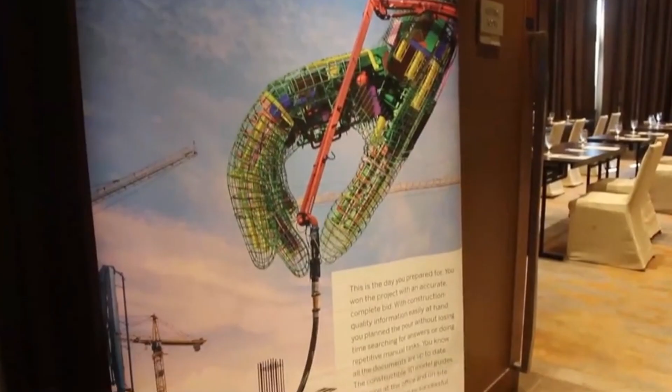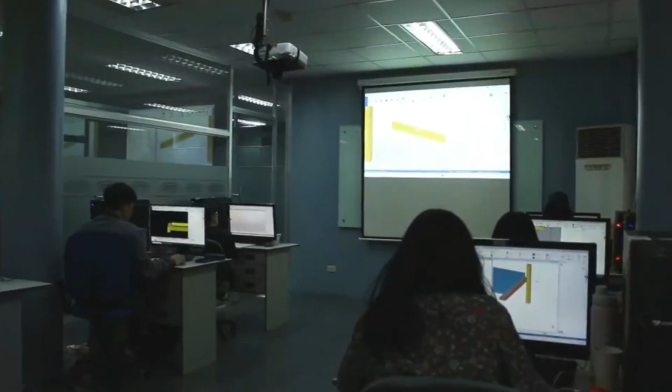As the sole reseller of Tekla Solutions by Trimble, VTS offers a comprehensive range of cutting-edge products and services to the building and construction industry. Our solutions include Tekla Structures, Tekla Tedds, Tekla PowerFab, Tekla EPM, Tekla Structural Designer, SketchUp Pro, and Trimble Connect. We also provide solutions for enhanced project visualization through augmented and mixed reality. Our solution for AR and MR includes XR10 with HoloLens 2 and Trimble Connect AR. VTS is the only authorized training and Tekla professional certification center in the Philippines.

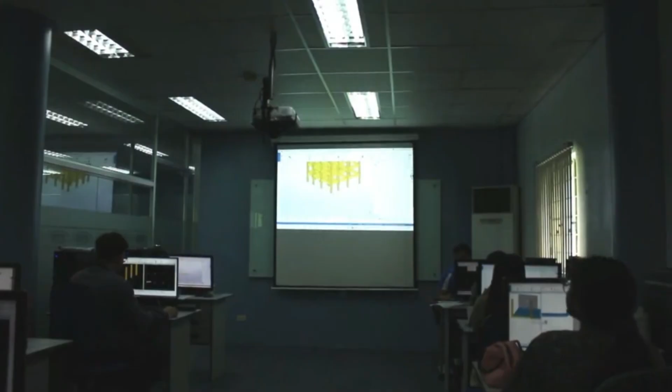In addition, we also provide linear construction material optimization solutions. We offer Raiden Systems, CP Manager, and AutoNest so that construction leaders can optimize their material usage, minimize waste, and streamline their production processes. Overall, we are entrusted by Trimble Inc. with the sales, marketing, business development, and technical support across Trimble's building solutions portfolio. We are one of the leaders of this technology.

We at VTS believe that customer engagement and enjoyment are just as important as delivering top quality solutions. We take pride in channeling opportunities and in fostering a strong sense of community amongst our clients. At the heart of our business, we place a strong emphasis on cultivating meaningful relationships with both our existing and new clients. Our commitment to customer service is unwavering, and we take pride in providing easy to approach local support that is always reliable and transparent.

Our goal is that when people think of Tekla Solutions, they immediately think of VTS, a trusted partner and industry leader that is dedicated to helping our customers achieve their goals and reach new heights of success. Vibrant Technology Solutions Incorporated, channeling opportunities. Tekla Solutions by Trimble. Still different, but always better.

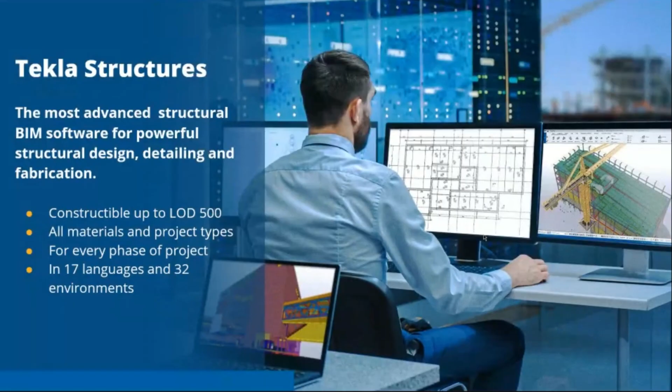So Tekla Structures is used by professionals worldwide. Tekla has been the industry standard for structural design and precast detailing nowadays. But let me show you how Tekla Structures evolved through the decades. Tekla began with steel origins, with a primary focus on steel detailing. But over the decades, it became a comprehensive platform addressing multiple materials like precast, concrete, rebar detailing, and many more.

As long as the material can be added in the solution, you can alter or model all the details inside Tekla Structures. This expansion in precast concrete solutions marked a significant milestone, bringing special tools for complex applications. Now, Tekla 2025 represents the culmination, and this development introduced advanced automation and collaboration tools that redefine precast delivery efficiency. So that's the evolution of Tekla.

So Tekla went from the steel detailing focus up to right now, where any material type can be created throughout the solution. Number three, let me show you the key features or the advanced tools for precast application that can be used in Tekla Structures.

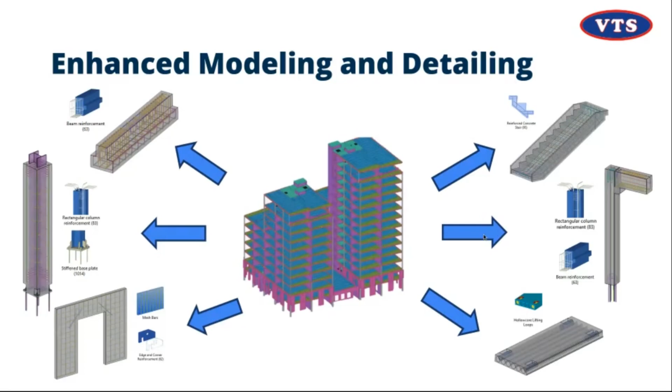In Tekla Structures, you can pick one point or two points to easily create our stairs, which already include the reinforcement details and the embeds you need, and all the details for the part will be easy to create. So let me give you a demo video so we can see in action how Tekla Structures can create constructible or enhanced modeling.

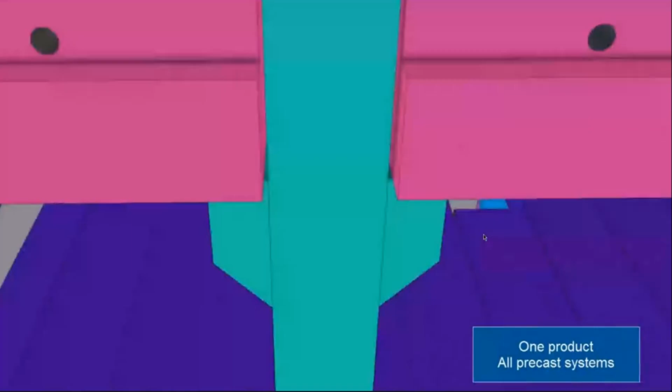With Tekla Structures, you can create a highly detailed constructible model with all types of precast components. Let me show you some sample projects where we can see all the details. For example, you have a column with the detailed reinforcement inside. You can also create detailed beams, walls, and even the precast slab details inside it. Then after that, we can easily do fast modeling.

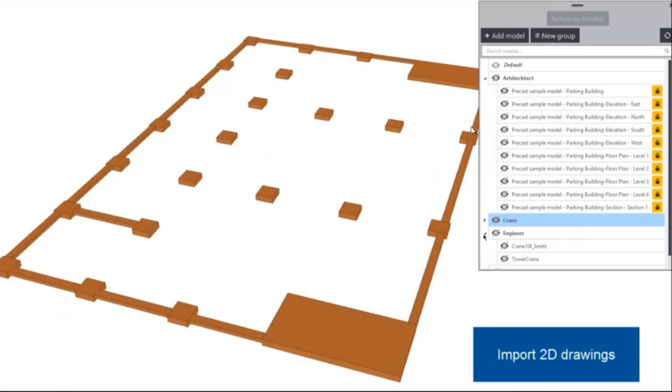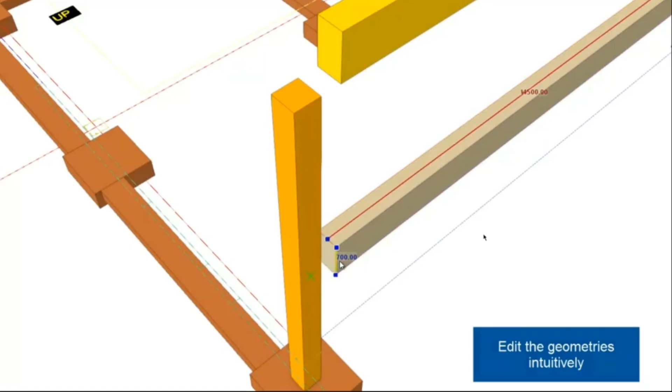For example, if we have a flat 2D CAD inside, we can model the column in just one click, beams in just two picks, and we have features to copy them to make the modeling pace much faster. And editing the geometry has never been easier in Tekla Structures. And for precast component connections, we have built-in ones that you can use, which can still be adjusted.

It depends on your profile needed. So the revision or profile modification will be easy. Even the adjustment, it will automatically adjust.

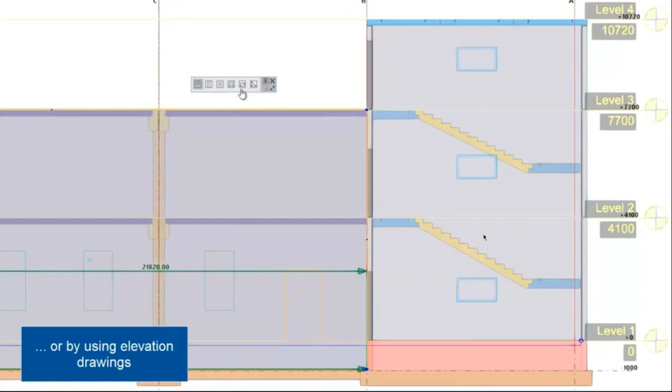For example, you have walls you're using. We have wall layout modeling implementation that we can use to easily create openings, even layouting our plans inside as a reference and creating the details inside it. It will make 3D modeling much easier.

If you have an adjustment inside, our tool is flexible. So it's easy to adjust using direct modification.

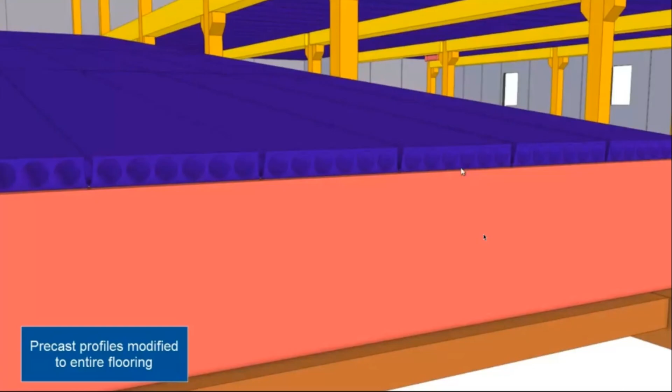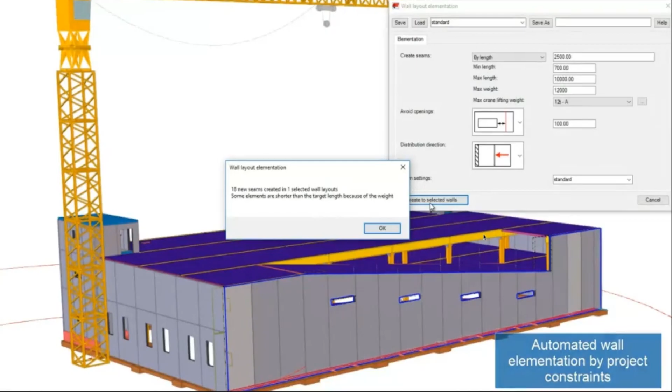In case you have to model in 3D, you can easily view it in the floor layouts. We have automatic modification of the profiles, even optimization of panels or slabs, you can do it easily. We're also introducing wall elementation, where you can cut the precast elements depending on the weight or dimension you prepared.

You can see, just click two picks and then you can easily cut. Then for the modification inside the panels, we have intelligent components which adjust easily when revision is needed.

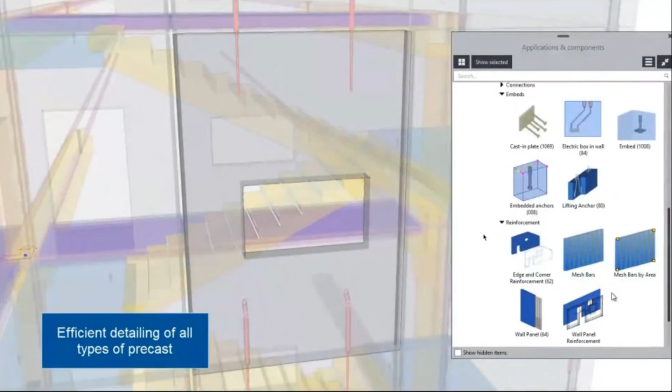In case you need to detail, we have each element showing the column reinforcements, so if you just pick the component, pick the element, it will automatically detail everything. You just need to adjust for precise detailing.

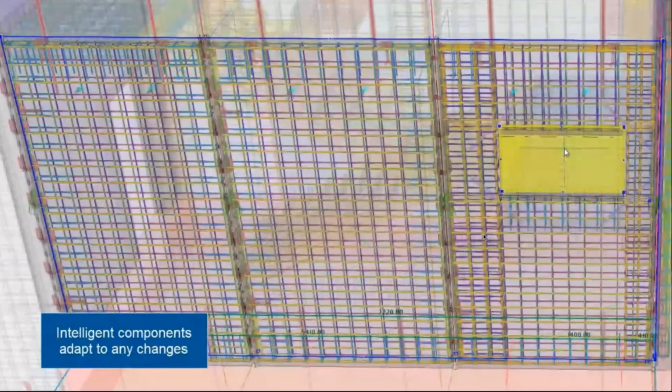If you need to batch details, we have the detailing manager to easily detail all the precast elements. For revisions, modifications, penetrating openings, adjusting embeds, it can easily adjust during the 3D modeling itself.

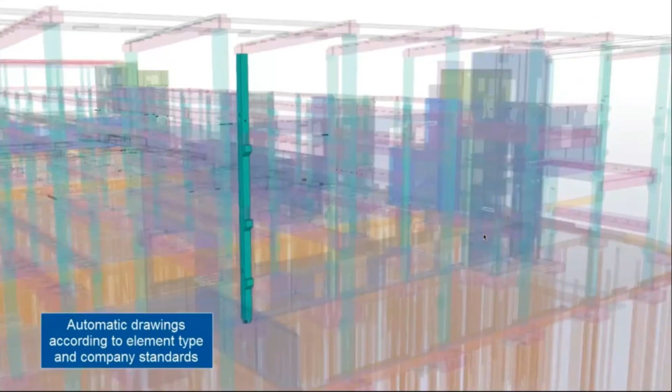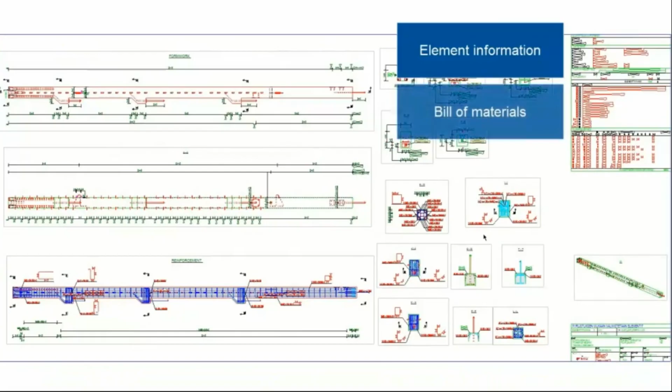Not only for modeling view and purposes, you can also create drawings inside the structures. It is a detailed drawing, so you can select the element, for example the column, and select a layout that's needed or closest to you. Then you output everything for the element, bill of materials, bar bending schedules, views, all automatically created based on the layout you have or need.

Even our different presentations with 3D, 2D view sections. Not only detailed panels can be created, you can also create panelization or a 3D view model. Sectioning has never been hard for Tekla, so you can create sections easily.

For revisions all throughout the projects, it's easy because it will automatically update the drawings once we adjust it in the model.

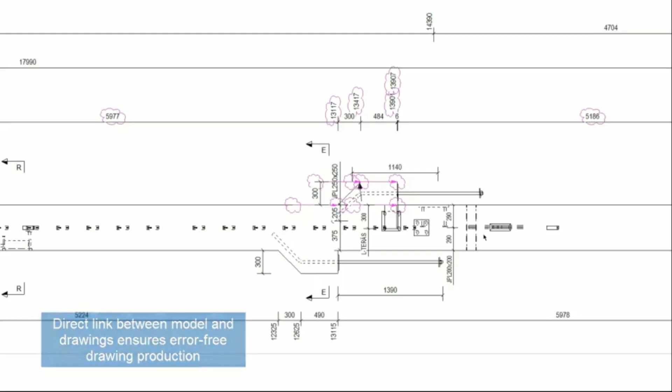Don't worry about communication or coordination, it can also be created in Tekla. Using our Trimble Connect, you can use the status model sharing to check every detail you have on site or in our projects.

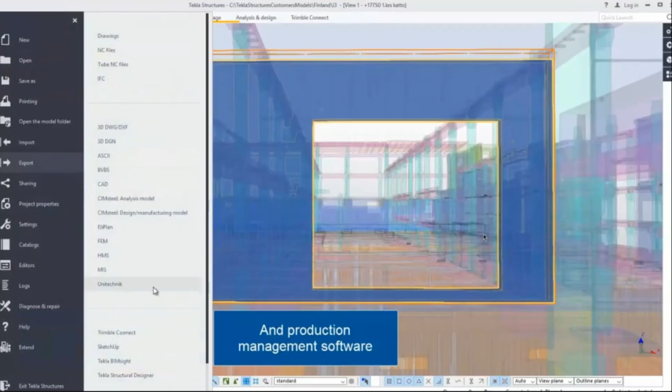For automation like to the machinery, the solution is more capable. It can output any file needed for the construction projects.

So that's for the enhanced modeling.

Let's talk about how automation in production can be. Tekla Structures is not only 3D models, it can extract not only details for precast elements or reinforcement. It can extract data that you can pass through a machine and directly make the fabrication if you are using robot settings or stations by station for the creation.

For example, if you create the reinforcement or this portion, you can do it inside Tekla Structures.

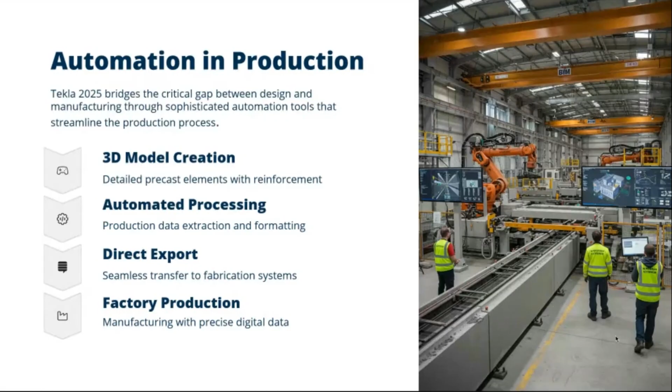I want to show you a small video or short video that can introduce our workflow using Tekla Structures.

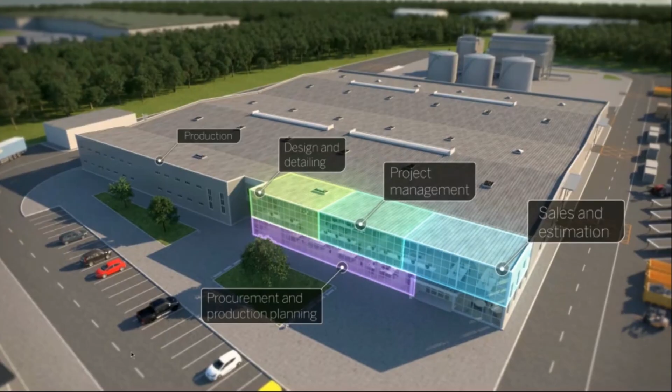Imagine you have a project that you will be starting for the design up to the estimating and for bidding, and all throughout the project's construction site if you have one. So from that, related to this you also have something related with the yard.

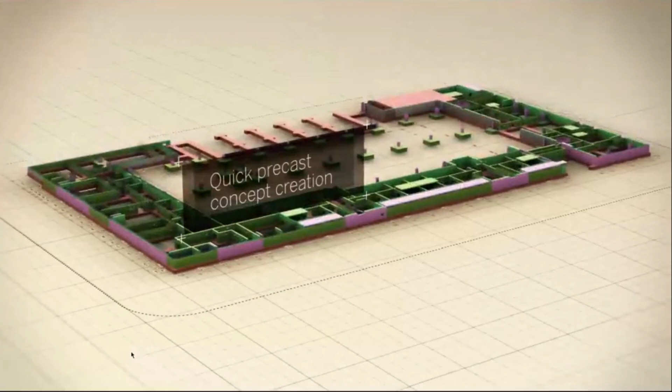Then for the conceptual stage, you can create the model inside Tekla Structures, easily panelization using wall layout. So it will give you a quick precast concept creation, then with an accurate estimate. Not only imagining for that part, but also making it accurate.

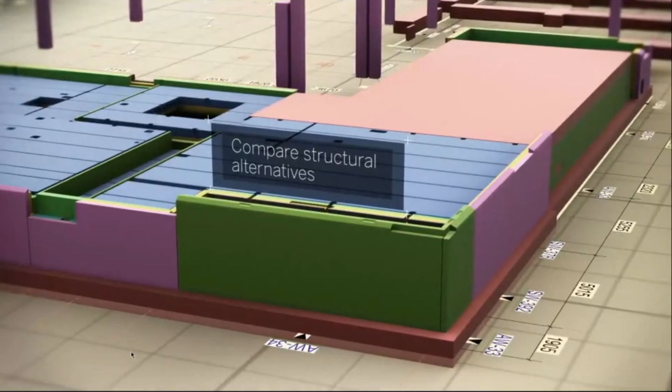Then you can see some options. You can do some options for some direction for the bearing walls. You can lay it out, because once it's laid out, you can see it already. So you can address what's needed for the project, or you can compare it already.

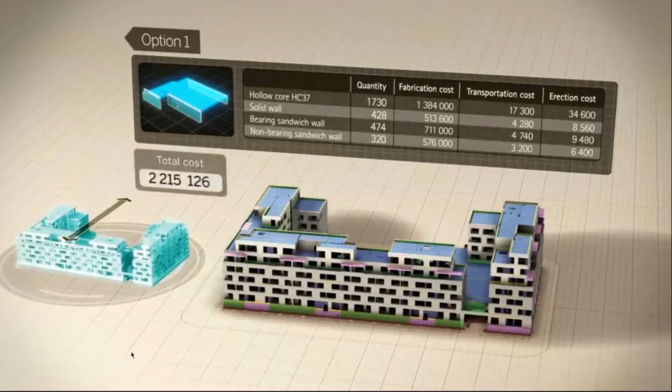But also, your quality is still the same. So you can address this direction for what will save more on our projects.

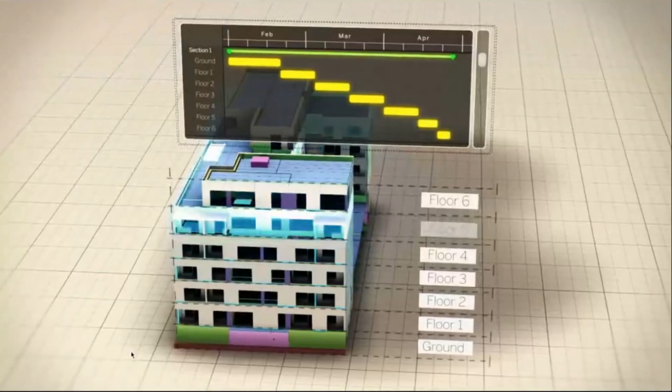Then of course, categorizing sections per area - you can use Tekla Structures to do it. Using our organizer, you can separate floors by section or by area.

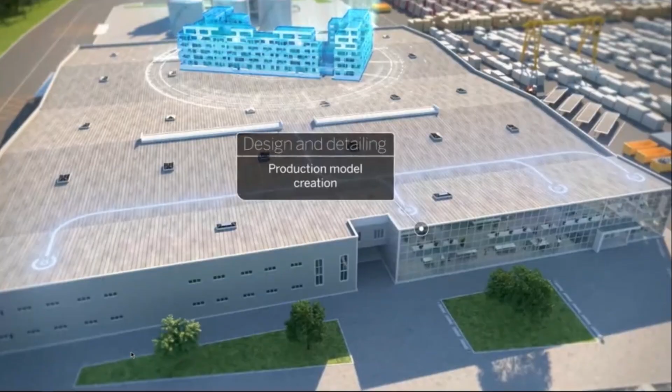And once the project is awarded to you directly, you can do the planning right away, or the production model creation by detailing. Once you finish the model, you can create the detailed structures, and you can analyze and calculate the structural design for that wall.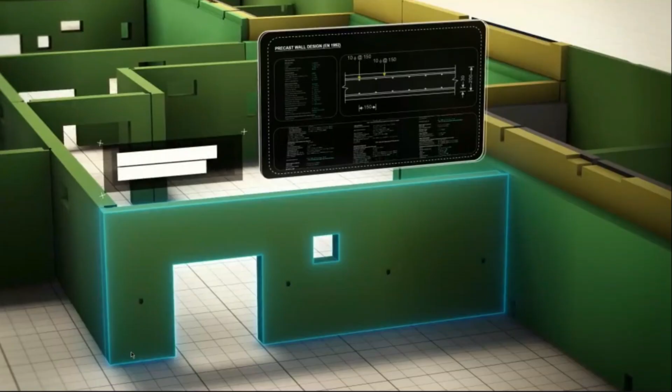Then you can detail every single reinforcement inside, which is easier to imagine if we have it in 3D. Then even adding the grouts, dowels, adding the lifting hook or lifting anchor, prop insert, even the wall connection per panel can be done.

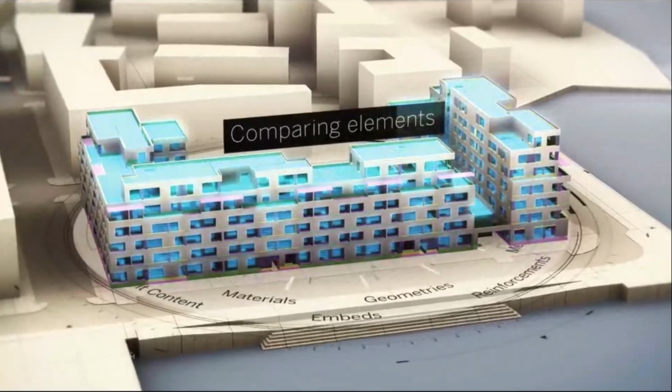Then you can compare every element. You can analyze it, or you can do it by element as needed - what your sandwich wall is, what your solid wall is.

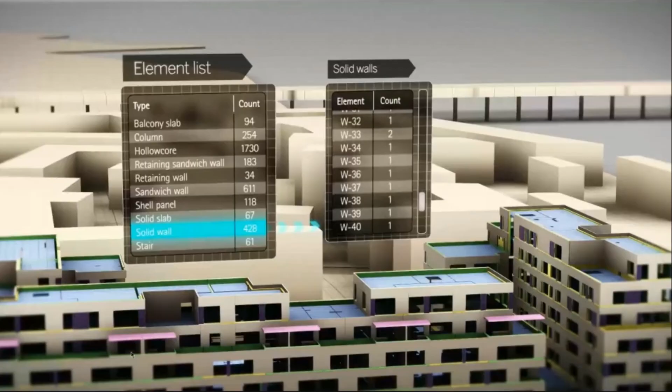You can do it. And of course, not only that, you can create also the drawing. As I said before, it's not only 3D model or 3D modeling we can do - we can also create 3D drawings and detailed drawings.

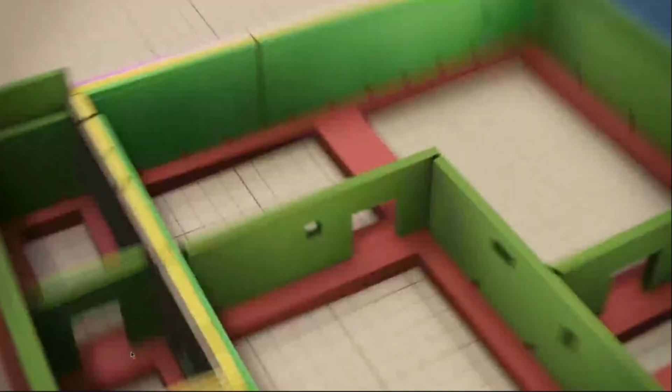Once you've done that, even the elevation for the panelization, you can create it inside Tekla Structures, then detailed per panel, you can do it also. So it's really a one-stop tool that we can use for our precast projects.

Even the detailed drawing per panel, you can output it, which will give bill of materials, 3D views, details for the mold, and details for the reinforcement. Once the drawing is completed, you can then go to our change management.

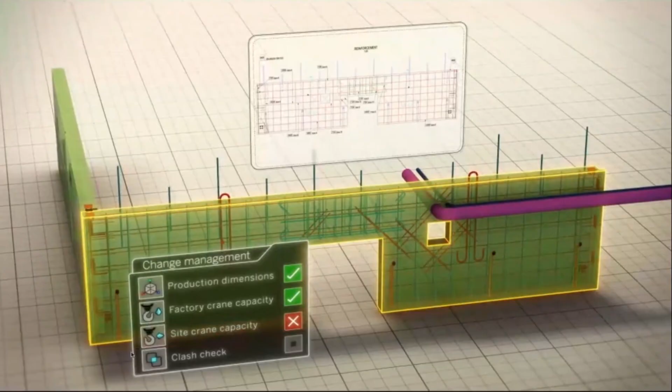And for example, you have a revision when there's a change from the architect with the design, you can easily adjust here in our Tekla Structures. The change management can track the production dimension in the factory.

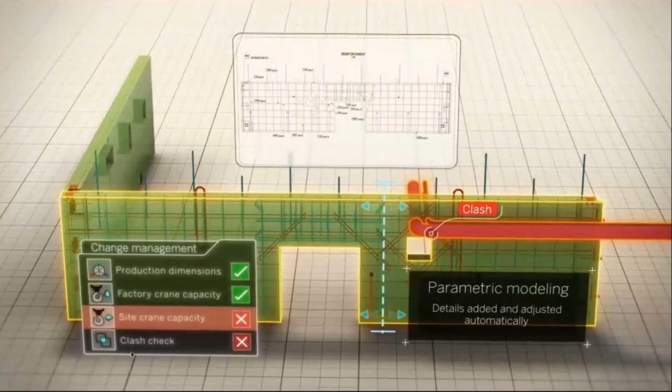So we can say that the weight is too big for the site capacity of our crane lifting - you can easily model or adjust. Then you can see when we adjust it, the drawing will also adjust.

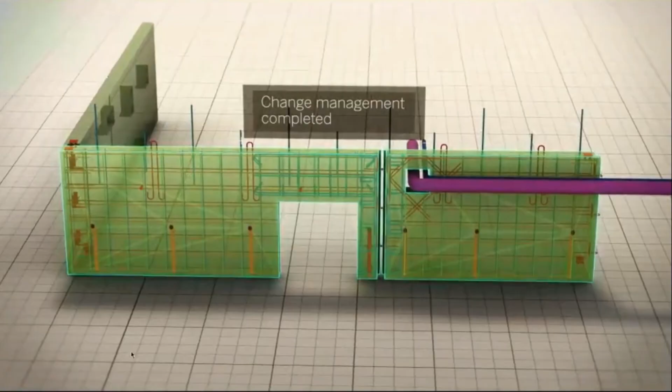So it's really model-based, that's what we need. Then you can address the concerns. During that, you can also do the production planning inside Tekla Structures.

You can address floor by floor. You can extract data output from Excel - what's the volume, what's the diameter, what's needed for this floor. You can extract everything using Excel.

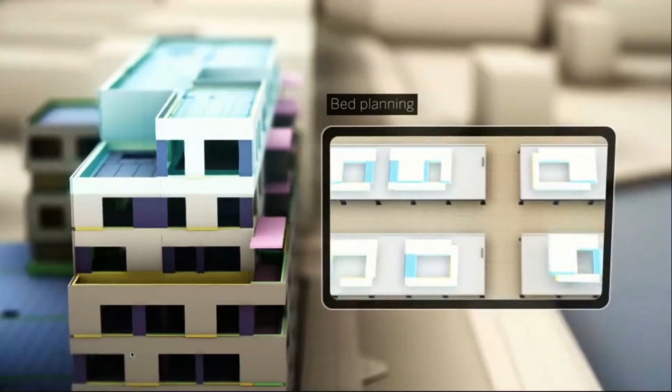Even the bed planning for your precast, we can do it - for example, the mold. We'll create the mold based on the details.

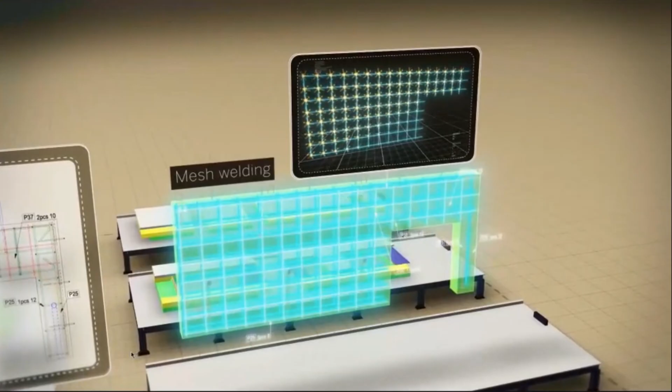So for our cut and bend, you can alter this here, or you can output the mesh or welding mesh needed. And the solution can give data that can plot the precast panels that we have.

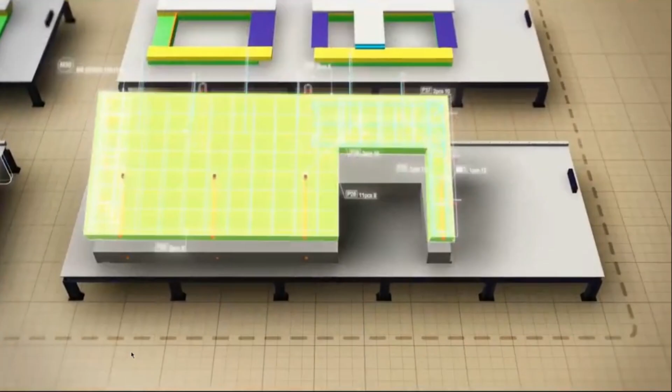So even when casting and the panel was produced, not only the data used for our panelization, but you can also create some delivery options - what needs to be brought to site first.

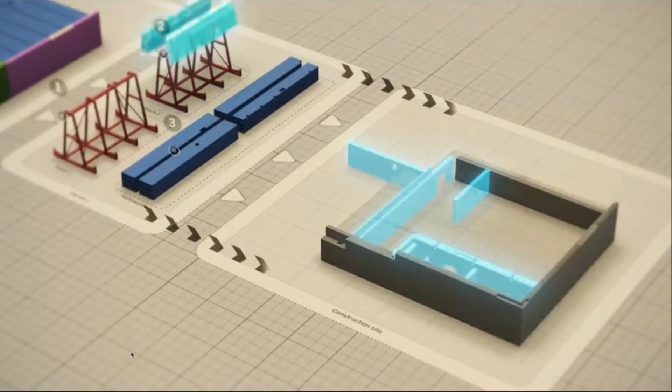How about this one, area 1, area 2 - you can also do it. This makes our deliveries faster for our projects. No need to worry, because the stock list is generated automatically.

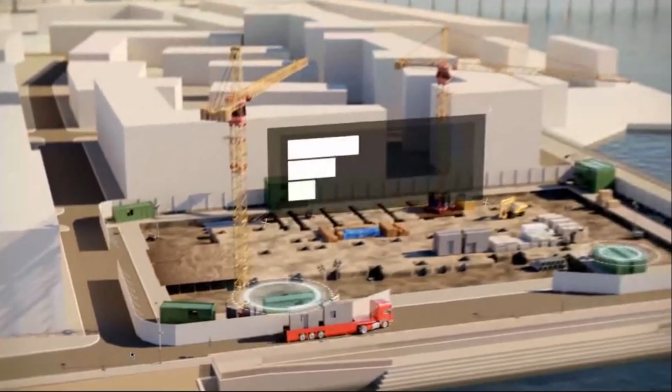Then once the report is created, pass it to our Trimble Connect to coordinate going to our site. Then using Trimble Connect, you can easily track what's finished on the projects.

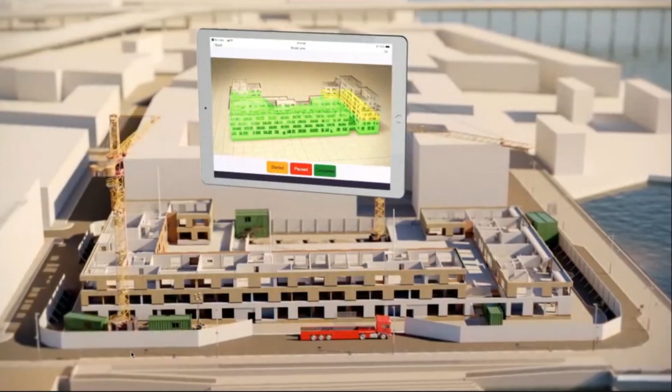What's the area still being assembled, what's the area being fitted or erected - so you can monitor it from start up to finish of our projects.

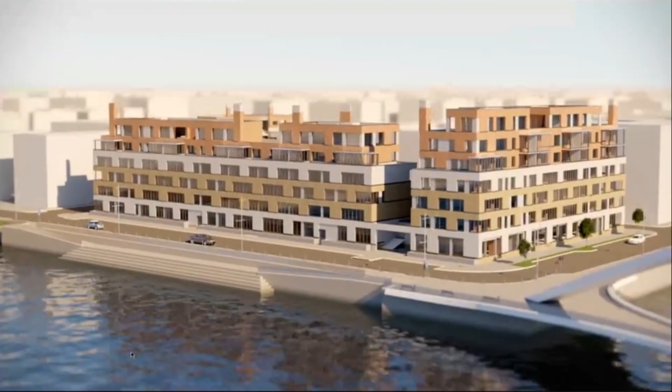So for all that, we will actually save time and give a more appropriate budget for those projects. That's how automation can show in Tekla Structures.

In terms of collaboration tools, we have what we call Trimble Connect. It is a cloud-based common tool, parang Google Drive, which gives all the disciplines incorporated in one data model or common data environment. So everything on the project will be related, then we'll upload every discipline and see our clashes, reportings, and needed comments.

Let me give you a deeper knowledge about Trimble Connect. Trimble Connect is a common data environment, like I said before. It will relate all the construction phases in the construction life cycle - from site excavation, equipment, production of precast, detailing, erection, to deliveries. It relays everything.

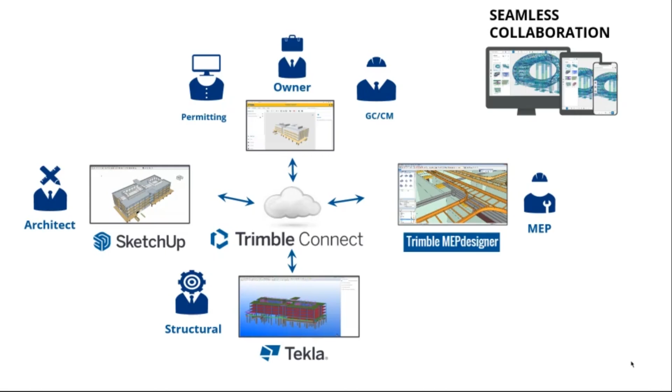What files can be uploaded? We say Trimble Connect is very user-friendly - any data you have, you can put into Trimble Connect. Even 2D files, PDF, AutoCAD, Excel, presentations, any type of data, even 3D models from other solutions, you can do it. For example, if it was made in another solution, you can still upload it to our Trimble Connect for better collaboration in the construction project.

Next, I want to introduce intelligent automation. Nowadays AI is very popular. Tekla 2025 also has AI-driven tools usable for Tekla productions, giving you more efficiency in time. Especially, you no longer need to search for the drawings you need to follow for your precast projects or precast elements you are currently working on.

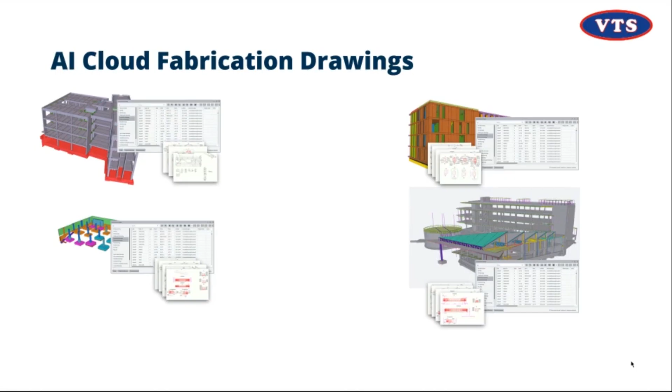Let me start with AI cloud fabrication. For example, you have 4 projects with different presentations for every project. You just need to gather all the data inside Tekla. Once you've issued it, that's okay - you just need to gather all the presentation data. Once gathered, you can upload it to what we call the cloud collection.

It takes that and puts it into the cloud collection to set up a company standard for you. Then, once we use it in Tekla Structures, the AI will classify every element you have. For example, you have a sample presentation for a panel portion. The AI will look for the closest presentation you can use for it, and it will apply to any element you have, as long as there's a presentation inside, it will apply.

I will give you some video so we can see it in action - it's better if we see it for ourselves.

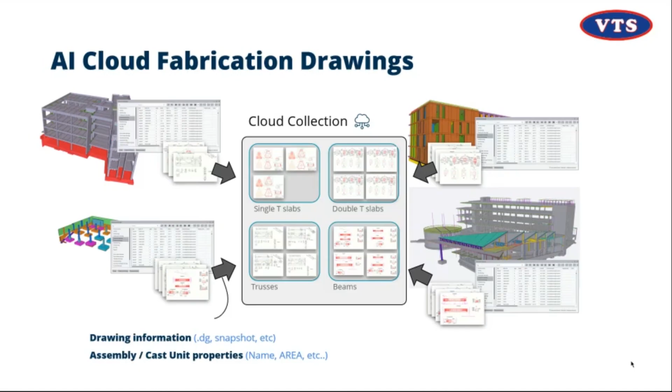So let's imagine you finish the whole project. This one is the finished project. Then, for example, user 1 will click the AI Cloud Fabrication and click the collection. Then create a company standard folder that pwede nating gamitin for all the projects. Then select the drawing list ng finished project natin. Select natin lahat ng presentation na meron tayo.

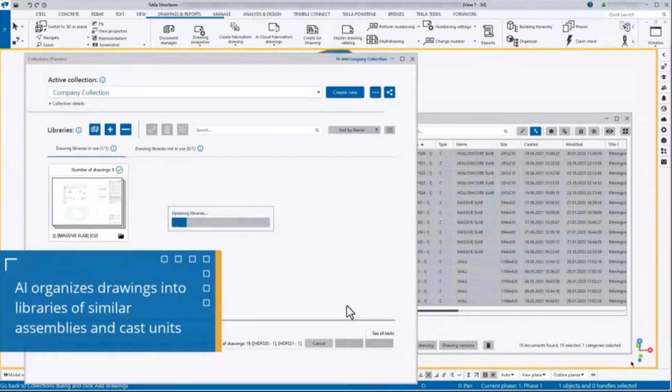And you can click add to upload and compile. I-compile niya yung ating mga drawings. It depends dun sa needed nating presentation. Then once ma-organize niya na, you can also check yung mga presentation na na-upload, just to see kung nakuha niya ba yung needed mo.

Then once okay na yan, pwede mo nang i-save yan. And once gusto mo nang i-share, just click yung share. I-add mo lang yung email address ng ating kasama doon sa ating projects, para makita niya yung mga presentation na ginawa mo doon sa cloud-based. Then user 2 will click the collection.

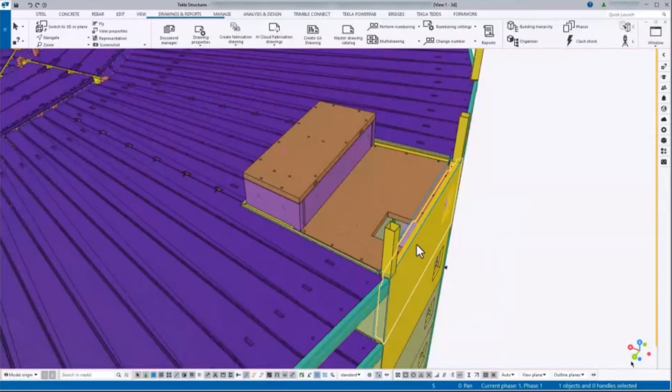Then hanapin niya lang yung company standard. Once he uploads or selects it, papakita na yung libraries ng mga drawings na meron tayo. So kung gusto mong gamitin, select mo lang tapos okay na siya, and you can select the element na needed mo, click the AI Cloud Fabrication.

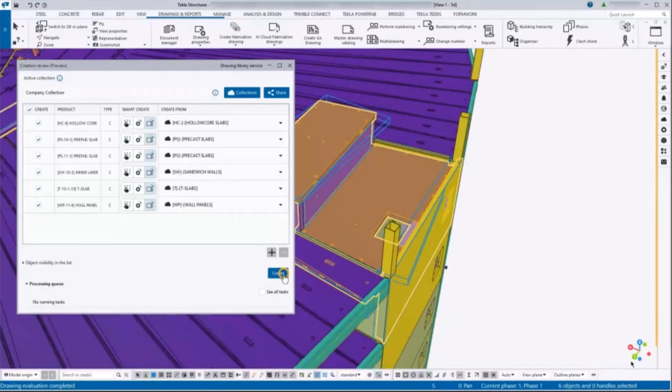Once ma-click mo, it will automatically maghahanap na siya ng pinakamalapit na presentation doon. So yan, makikita mo. Then click mo lang yung create, then yung AI na yung pipili ng presentation. So you can check yung presentation. For example, mag-add tayo ng stairs, just to show yung pinakamalapit na stair niya or the settings. Then create mo lang.

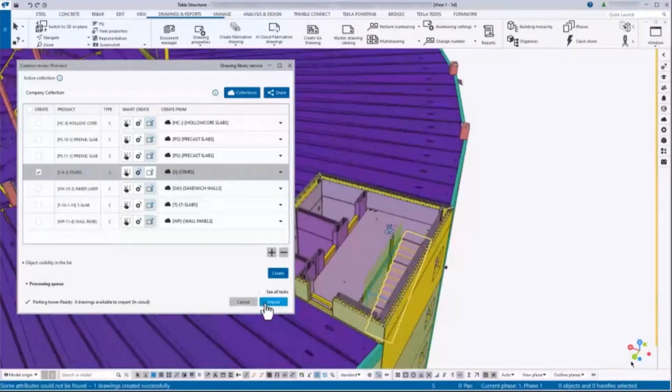Then once ma-create mo na, you can open yung drawing. So you can automatically open the drawings. Hindi mo na kailangan mag-wait ng ilang hours for the presentation. So anything na nakuha niya sa standard will apply, even the templates, the section, even the paper size. So it will save time and effort para sa atin sa pag-detail.

So that's all for the presentation ng AI natin.

So let me relate naman how cost and sustainability relate in Tekla Structures. In Tekla Structures 2025, we address the growing demand for sustainable construction through its innovation, what we call the embodied carbon calculator. Beyond environmental benefit, the software optimizes material usage by 30% through design optimization. We also introduce the carbon calculator, typically decreasing embodied carbon by almost 25%, and 20% cost saving on average material cost in the entire project.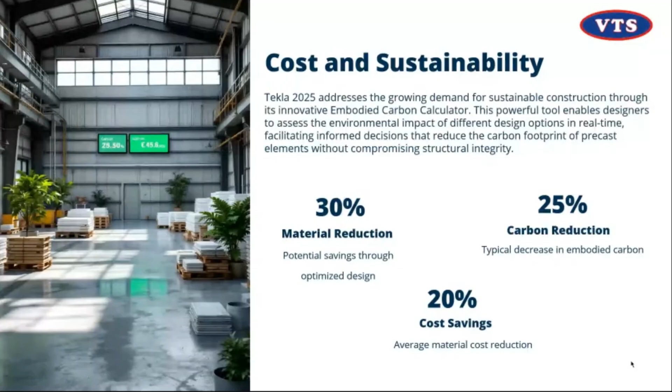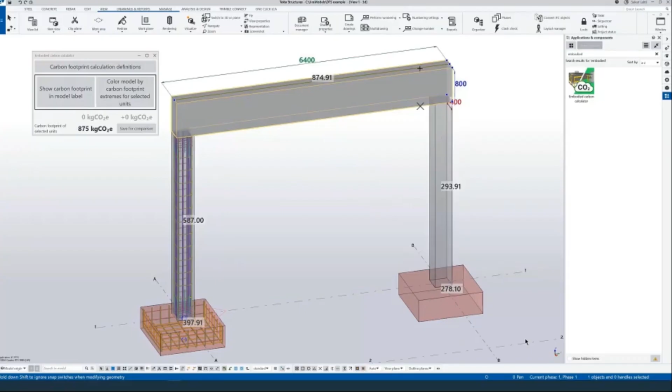Let me show you in action the embodied carbon calculator. First, while modeling, it is an additional tool sa warehouse na pwede mong i-download, which dynamically, when you select an element, shows the carbon footprint ng ating element. Then you can model different types of material and compare kung ano ba yung mas mababang carbon footprint kapag ginamit mo.

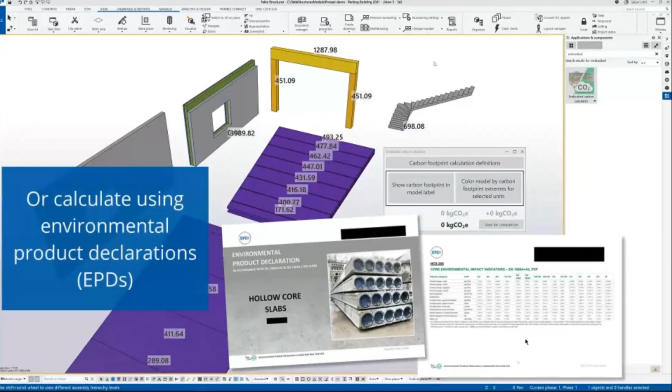Even organizing carbon footprint by weight or by volume, you can calculate easily and colorize it to see kung ano yung mabigat at magaan. For example, you have two projects, yung isa horizontal ang direction ng slab, yung isa vertical. You can compare kung saan ka mas makakatipid. You can select every part or the entire project and see the difference nila.

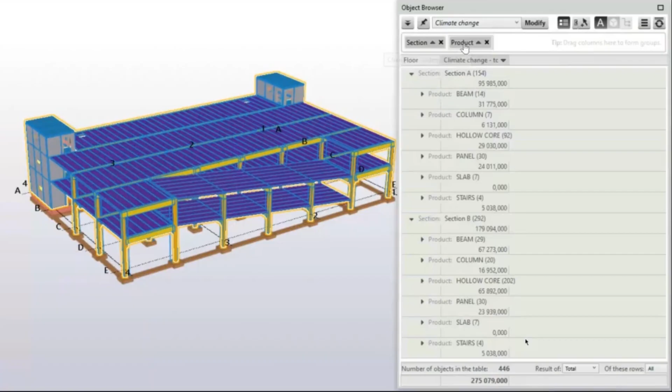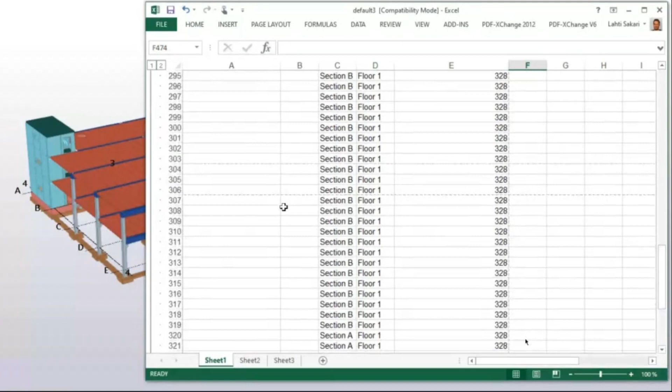And you can also use our object browser. We can view every part per section, per product, kung ano yung carbon footprint. And you can export it directly to Excel, so do not worry about data, kasi pwedeng i-extract agad for Excel reports. Even if you want to share it to other clients, you can use Trimble Connect and yung carbon footprint papasok na doon.

So that's for the embodied carbon. So for the last part of my presentation, let me show you a real-world example of benefits. Now, this is the case study na ginawa namin dito sa Philippines.

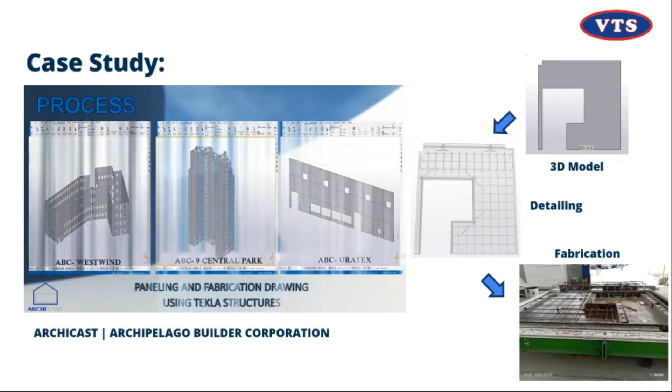Let me show you our first client, ArchiCast. Actually, not first, but ArchiCast is under Archipelago Builders. Subsidiary sila nito, sila yung precast para dito. So they first encountered the problem na using manual calculation, hindi nila mapoproduce yung quality. So that's why they tried and i-adapt yung innovation ng software, which is Tekla Structures.

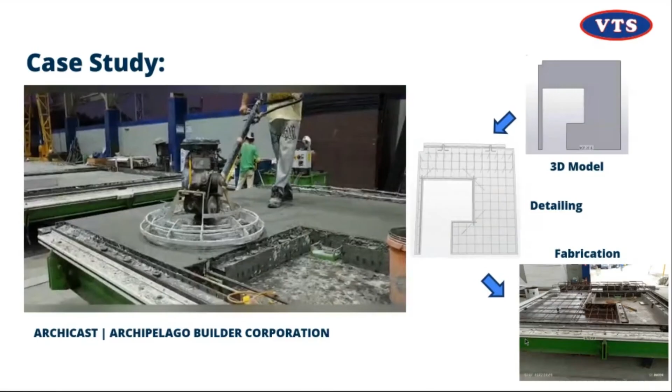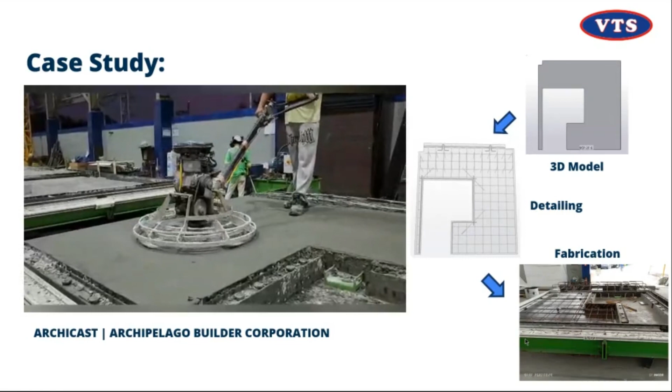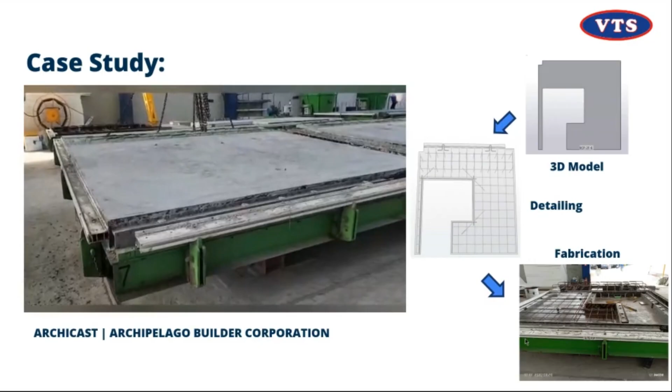Ito yung mga project ni Archipelago na sinupplyan ni ArchiCast. So within a span of 6 months, natapos nila yung project. The project was completed and they did not encounter any problems. By using also Trimble Connect for the coordination, they can easily track kung ano yung i-deliver pa lang, ito yung para doon sa set.

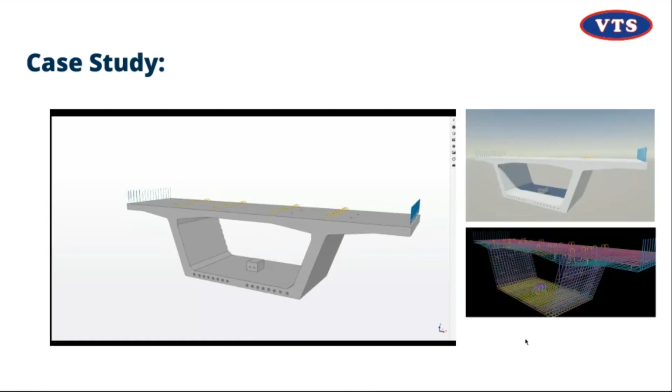And also their precast pier, which is the viaduct. It was created in Tekla Structures with detailed reinforcement. We helped them adapt the precast details for their projects. So based on the model, the clashes of the rebars can be easily seen and it enables good coordination between the construction and the technical team because they can immediately visualize the current clashes in the model. In the model pa lang, hindi mo pa magagawa yung project in actual, but nakikita mo na agad. Madaling mag-address ng mga concern regarding our projects.

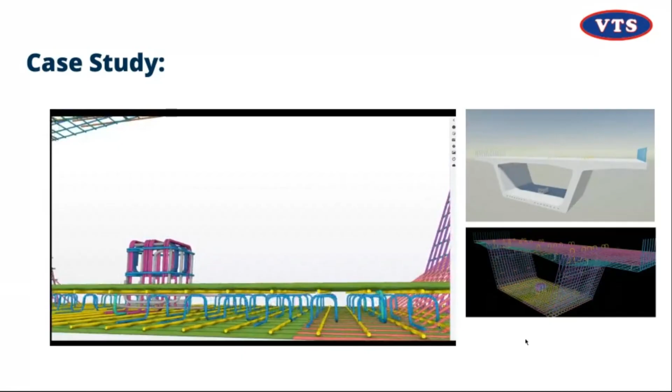So automated workflows eliminate time-consuming manual tasks. Based on them, nakasave talaga sila ng time. From the phase pa lang, using parametric precast modeling for the elements and components, it gives 50% faster modeling. Then the detailing that we do manually, here in Tekla Structures you do with automated drawing generation, giving 60% faster drawing production.

And for the deliveries and real-time coordination using Trimble Connect, it gives a 70% reduction in coordination time. So hindi mo na kailangan pumunta sa site to check. Using a tablet and a desktop tool, you can coordinate easily. Overall, they had 30 to 50% faster project delivery, saving across the entire workflow.

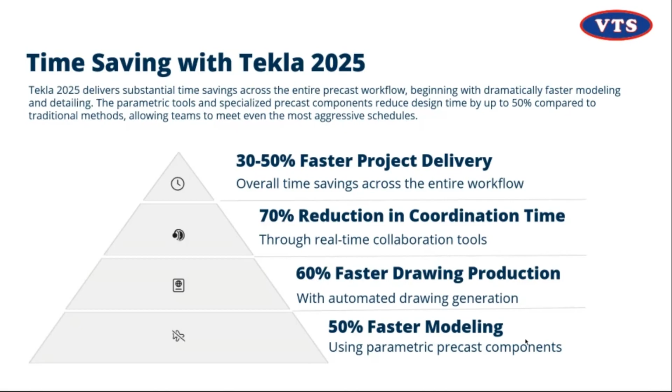And why Tekla 2025? Tekla Structures is the most highly detailed BIM, which gives you accuracy in the model. It is 1:1. When you model a part, it gives you accuracy in extracting data, volume, weight. So precisely, our errors are reduced. Then, if you are using good workflows for automation, it gives you efficiency.

And once you have efficiency in the workflow, you will be profitable in our projects, and we sustain our reduction of material waste. So that's why Tekla 2025 is the best choice for our projects.